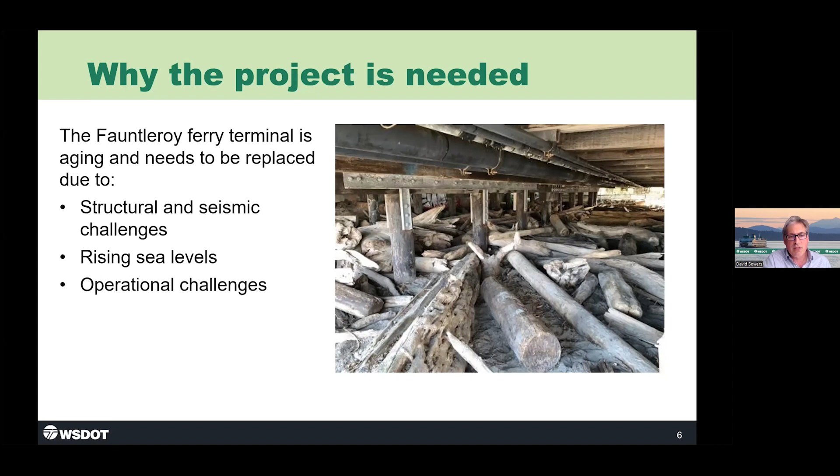So what we're using to start this sort of planning and initial environmental process is a process called the Planning and Environmental Linkages Process, or PEL for short. You'll see that term used throughout this presentation. This early planning phase helps Washington State Ferries identify transportation issues, environmental concerns, community values, and economic goals early in the project planning.

We are currently in the level 3 screening process, where we are considering things like traffic conditions, cost estimating, permitting requirements, and ways to make the terminal work safer and more efficiently for everybody. We are also studying Good to Go, which is a system that we use in the metropolitan area to toll State Route 99, 405, and SR 520, for example.

So during this phase, the project team, using input from the community and our advisory groups that Hadley mentioned earlier, will refine this range of concepts, which we call alternatives. And later in 2024, hopefully by the end of this year, WSF will recommend an alternative that will go into the formal environmental review process, which is called NEPA.

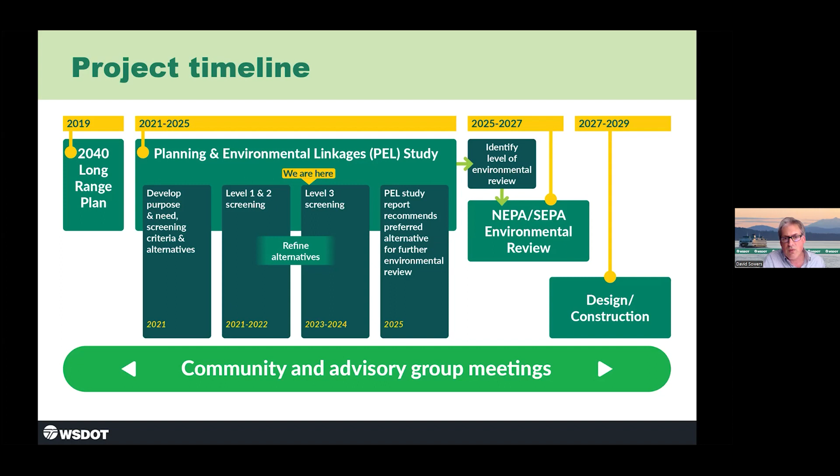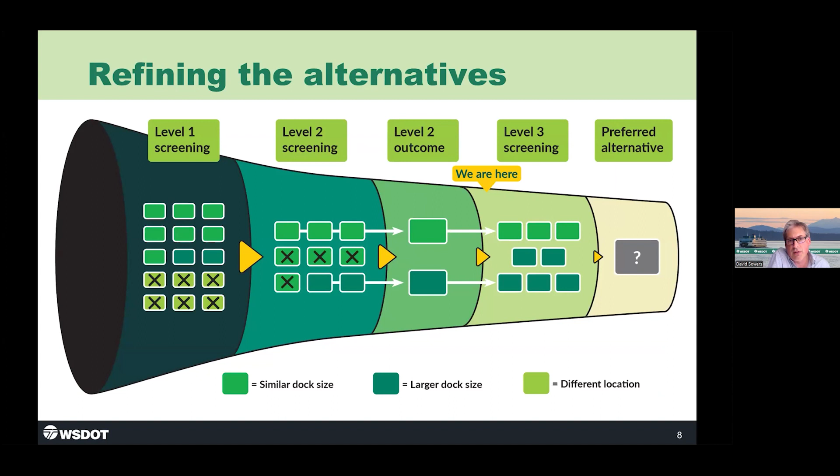All right, so I'd like to share a little bit more about where we are in the process. The graphic summarizes the process that we're using to narrow down the range of alternatives. We've eliminated options outside of the Fauntleroy area when we did our level 1 screening. And at the end of level 2, we decided on 2 main options. Now we are further refining those alternatives before we recommend an alternative that will move forward next year.

I do want to clarify some terminology on a same footprint alternative that was studied during the PEL process. This alternative was a dock that would be exactly the same size as the footprint for the existing terminal. Not to be confused with terminology like same size dock, which represents a dock that has a similar holding capacity as the current dock. This same footprint alternative did not meet several elements of the project's purpose and need.

It did not provide efficient and safe loading and fare processing for pedestrians, vehicles, and bikes. The dock would also be too crowded for crews to effectively sort and stage trucks, ADA folks, and emergency and other priority vehicles. It did not provide operational efficiencies that support reliable service, while again meeting the service levels that we project for this route in the 2040 long-range plan.

And of course, the difficulty we have in sorting traffic, as many of you know, for 2 destinations. This same footprint size also did not improve multimodal connections or enhance customer experience or accommodate ridership growth consistent with the long-range plan. So with that, I'm going to turn it over to Ed Thomas, who's going to walk us through the alternatives a little bit more.

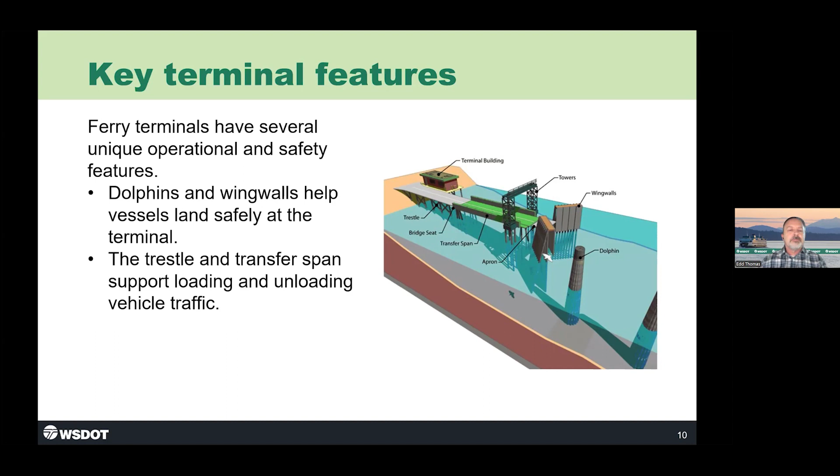Common features of the new terminal. There are several key features consistent across all alternatives: replace the dock at the same location, accommodate 186 vehicles between dock and Fauntleroy Way holding, meet seismic design standards and accommodate rising sea level, space for large trucks to safely navigate, wider lanes and space for people walking, rolling, biking, and driving motorcycles.

More space for operations, a new terminal building, a dedicated drop-off and pickup area for passengers with disabilities, a larger toll plaza with two toll booths, and minimal dock widening near the shoreline. In addition to these features, we are also studying Good to Go, advanced ticketing, and other features like overhead passenger loading, and working with our partners at Seattle Department of Transportation to consider changes to the intersection.

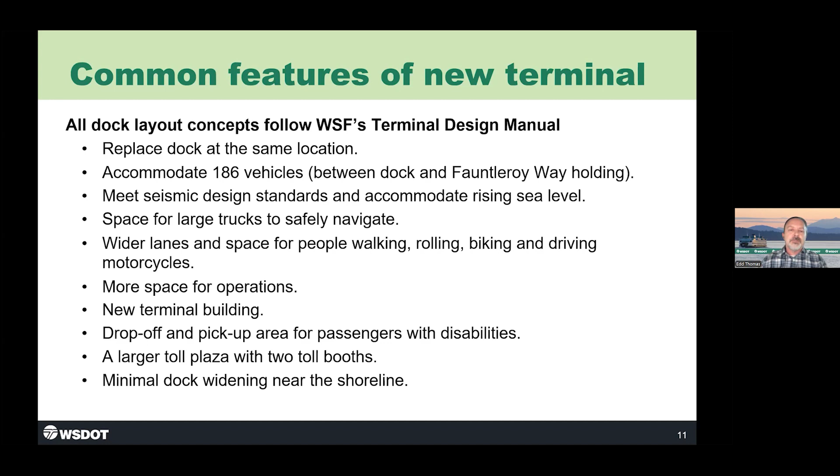This alternative slide shows the collection of all the alternatives. There are slight variations in each alternative, and we're going to run through the slides of these options quickly a couple of times to show the differences. Then I'll talk in more detail about each alternative.

As we go through these, please take note of the shaded blue areas on either side of the dock. This is eelgrass habitat, which Marcia will speak to in greater detail a bit later. We designed the terminal options to avoid impacting this environmentally sensitive area.

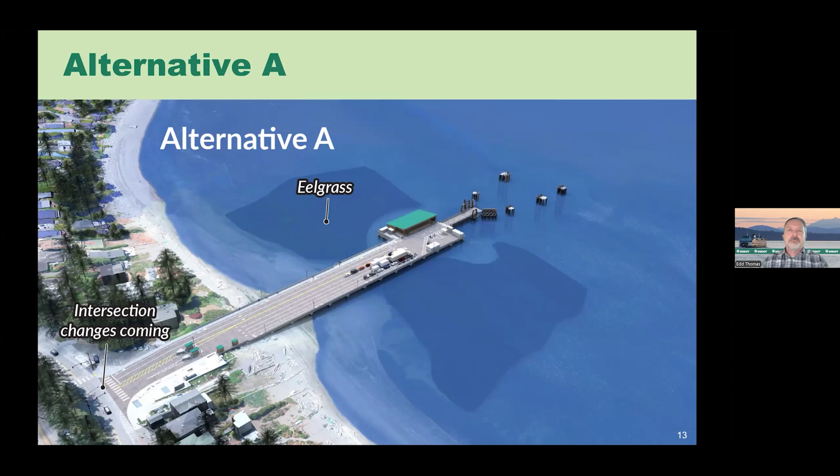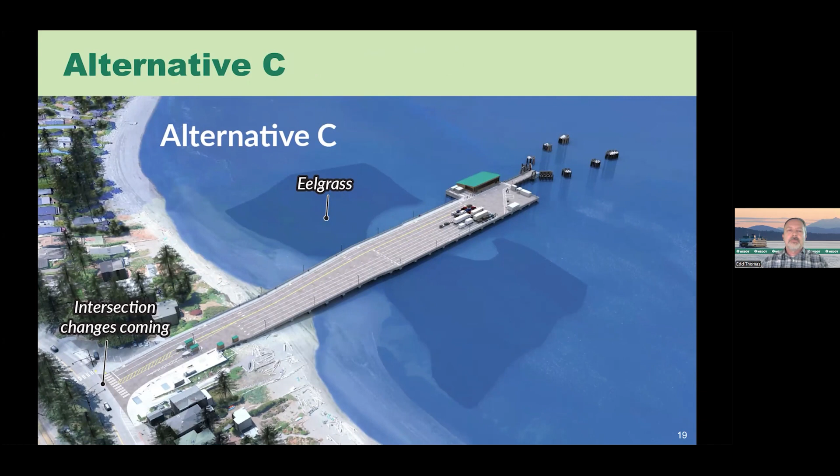Now I'm going to cover each alternative at a high level, but as a reminder, this information is available in detail at our online open house.

Alternative A, the first option, replaces the dock at the same size as the current dock and maintains the existing wing walls and dolphins, the in-water structures that help guide the ferry into place and protect the dock. This concept is slightly wider than the current dock to provide space for a large vehicle to navigate and provide space for pedestrians, cyclists, and vehicles. The dock capacity is 76 vehicles, fewer cars than the current dock. The dock width is 85 feet. The length of the pedestrian walkway is 850 feet, and it has 4 holding lanes.

Alternative A1 is similar to alternative A, but includes new dolphins and new wing walls. This option is slightly longer and holds the same amount of vehicles as the current dock. Dock capacity is 84 vehicles. The dock width is 85 feet. The length of the pedestrian walkway is 905 feet, and it has 4 holding lanes.

Alternatives A2 and A3 are variations of alternative A1 that have the same layout as alternative A1 and include good to go and advanced ticketing as A2, or only advanced ticketing technology as A3.

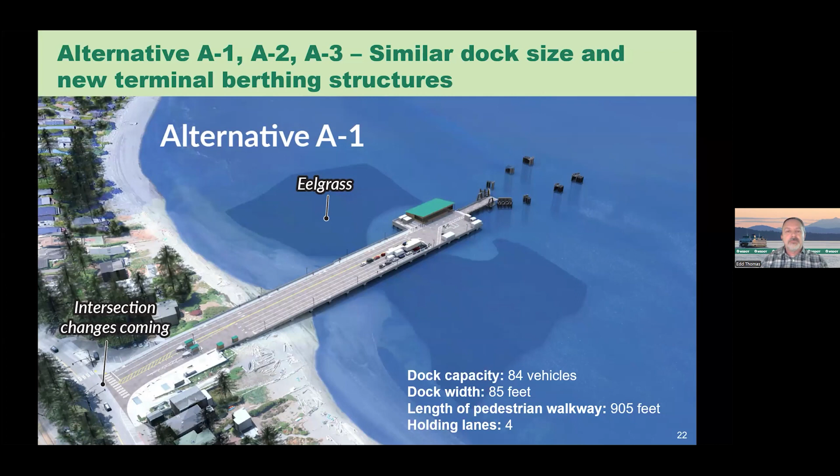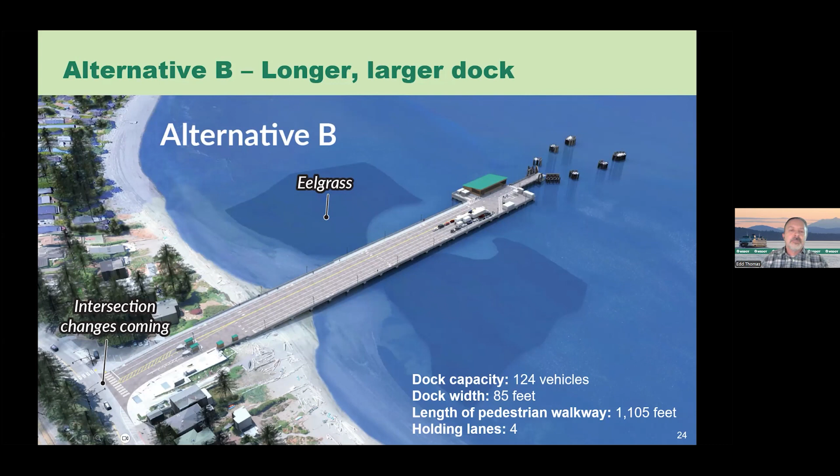Alternative B is similar to alternative A1, but is longer, moving the transfer span, wing walls, and dolphins to deeper water. Moving these elements to deeper water may allow eelgrass and macroalgae to regrow in and around the scour hole. This dock capacity is 124 vehicles, or 1 full Issaquah class ferry. Dock width is 85 feet. The length of the pedestrian walkway is 1,105 feet, and it has 4 holding lanes.

The next alternative, alternative B1, is the same length as alternative B and includes 1 extra holding lane on the north over deeper water to minimize impacts to Cove Park and environmentally sensitive areas closer to shore. The dock capacity is 155 vehicles. The dock width is 94 feet.

The length of the pedestrian walkway is 1,105 feet, and it has 5 holding lanes. Alternative B2 is similar in length to alternative B1 and adds 2 shorter holding lanes to the south, further out over the water. This tapered dock design is narrower near the shoreline. This dock capacity is 155 vehicles. The dock width is 76.5 feet near shore and 103 feet over deeper water. The length of the pedestrian walkway is 1,105 feet, and it has 4 full-length holding lanes and 2 half lanes.

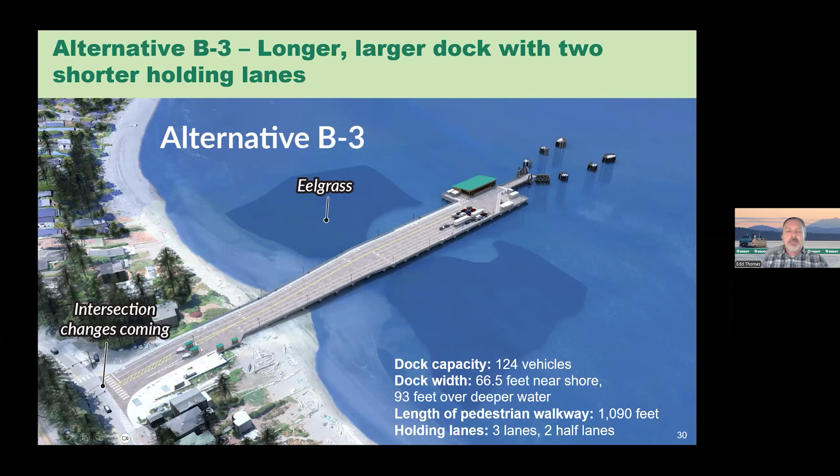Alternative B3 is the same configuration as alternative B2, is slightly shorter than alternative B2, and includes 1 less holding lane. The rest of the design features are the same as alternative B2. This dock capacity is 124 vehicles. The dock width is 66.5 feet near shore and 93 feet over deeper water. The length of the pedestrian walkway is 1,090 feet. It has 3 full-length holding lanes and 2 half lanes.

The last alternative, alternative C, is the same configuration as alternative B2 and adds a full-length holding lane on the north side of the dock. This dock option can hold 186 vehicles, removing the queue on Fauntleroy Way Southwest on most typical days. The dock width is 85.5 feet near shore, 112 feet wide over deeper water. The length of the pedestrian walkway is 1,105 feet. It has 5 full-length holding lanes and 2 half lanes.

And now I'd like to hand it over to Charlie.

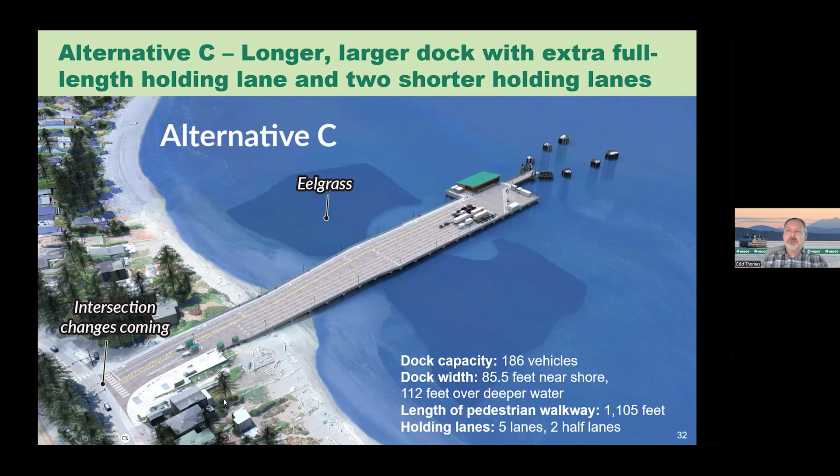We have developed design renderings to help you better visualize the differences between each one. But please keep in mind that these show conceptual finishes based on the Washington State Ferry's new Mukilteo terminal. The intent is to show the dock footprint and general layout of each alternative. We will seek community input on the look and feel of the terminal a little later in the design process.

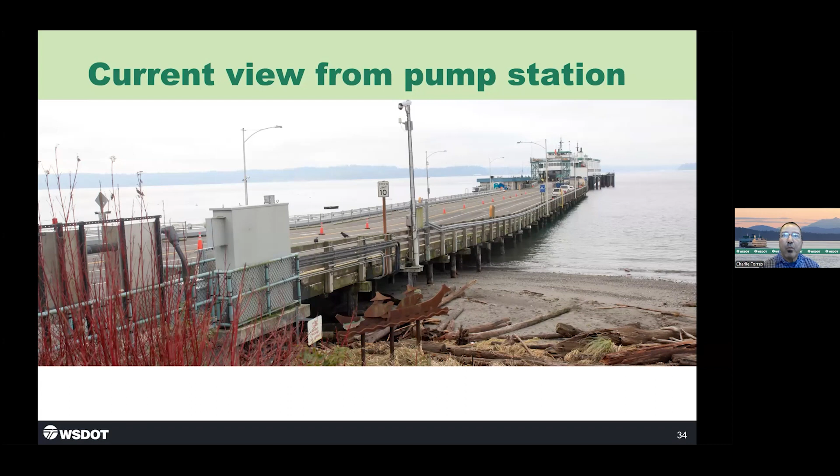The first image of the current dock is taken from the King County Pump Station. These renderings help show what each dock option looks like near Cove Park. This is a current view from Cove Park, and these next few slides show how each alternative looks from the beach.

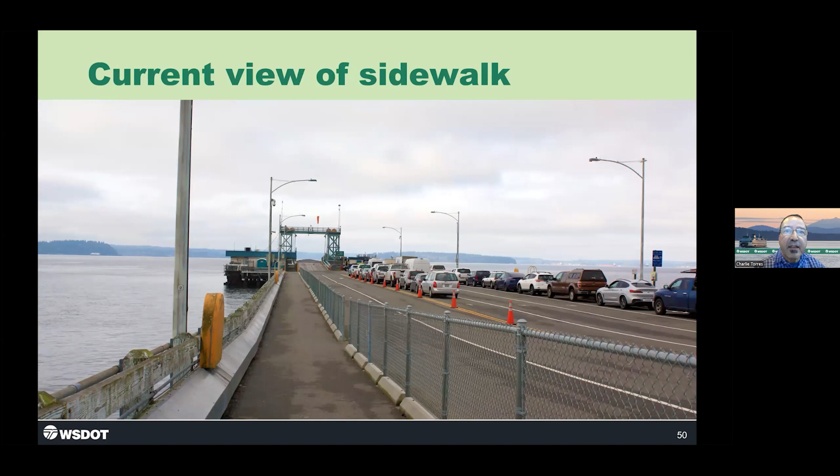Okay, the next view shows the existing walking path and what the pedestrian pathway and dedicated bicycle lane look like. The walkway is 7 feet wide, the same as the current dock.

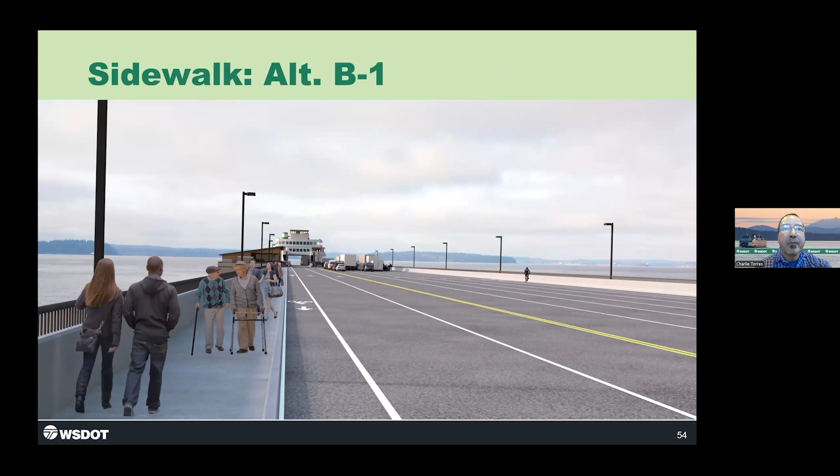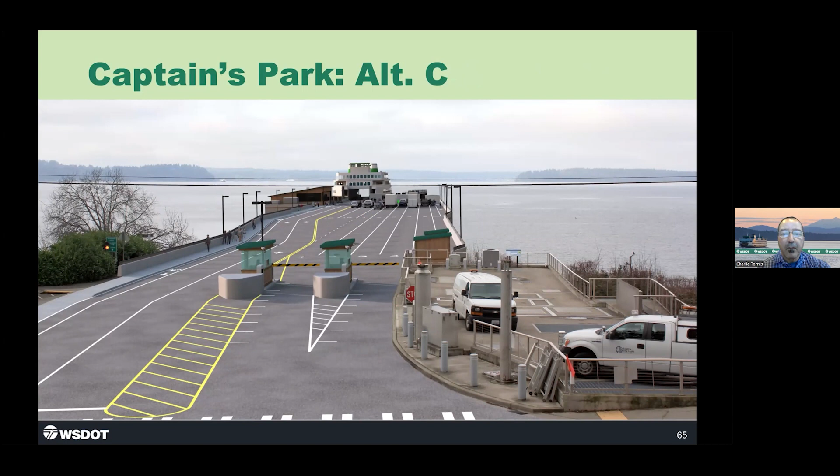To address one of the key needs for this project, improving terminal efficiency and faster ferry loading and unloading, Washington State Ferries will improve the intersection of Fauntleroy Way Southwest and the terminal at Barton Street Southwest. Washington State Ferries is working closely with agency partners, specifically Seattle Department of Transportation and King County Metro, to plan an improved intersection configuration that includes a traffic signal.

These improvements are needed for any alternative selected and will be needed during construction of the new terminal. Washington State Ferries will begin intersection improvements ahead of the larger terminal replacement project. We will share more information as plans progress.

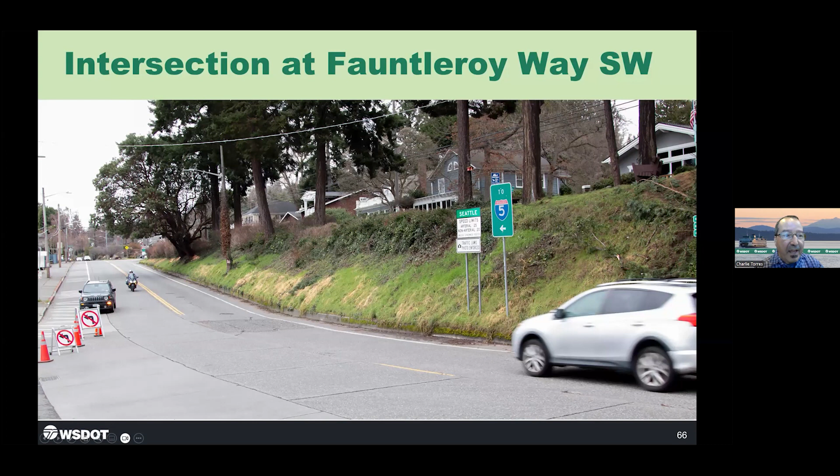And now I'm going to hand it over to my colleague, Marsha Tolon, to talk to you about permitting and environmental issues. Okay, thank you, Charlie. I'm Marsha Tolon with the Washington State Ferries, the permitting and environmental lead.

The image now shows key environmental features and resources near the terminal that we've considered as we develop the alternatives and will consider when we screen the alternatives. There are some key environmental features or elements that I'd like to point out.

First, there's the intertidal and nearshore habitats near the dock that provide valuable habitat for salmon and other marine life. There are eelgrass beds north and south of the trestle, and a high concentration of kelp to the west of the ferry slip. There's no eelgrass or macroalgae in the area around the end of the dock, where propeller wash from vessels creates a scour hole.

There's Fauntleroy Creek, which flows under Fauntleroy Way Southwest and then under the dock and into Puget Sound. Fauntleroy Creek provides spawning habitat for coho salmon and for coastal cutthroat trout.

The dock is supported by 430 creosote treated timber piles. With this project, the dock also includes more than 1,000 tons of toxic creosote treated timber, a known water pollutant. The density of the piles also influences the flow of Puget Sound tidal waters and Fauntleroy Creek near the trestle.

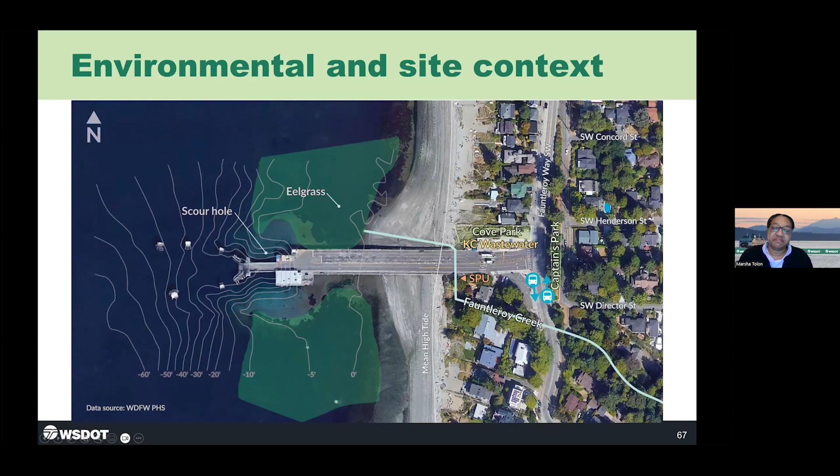As we move closer to recommending an alternative to take into the environmental review process, we first take it through level 3 screening. That process is similar to what we did for level 2 screening. We developed these criteria based on our purpose and need statement, which was extensively reviewed by our advisory groups, and that review was in partnership with our advisory groups.

We refined the screening criteria we used in level 1 and 2 to develop our level 3 screening criteria. The screening process is much more detailed for level 3 and uses more specific metrics. The list includes the general categories we used for level 3 screening. To view the full list of screening criteria, please visit our online open house.

The screening criteria categories include meeting requirements for structural reliability, accommodating projected sea level rise, which is resilience, and improving operational efficiency, which is to minimize dwell time, process vehicles more efficiently, and maintain on-time performance.

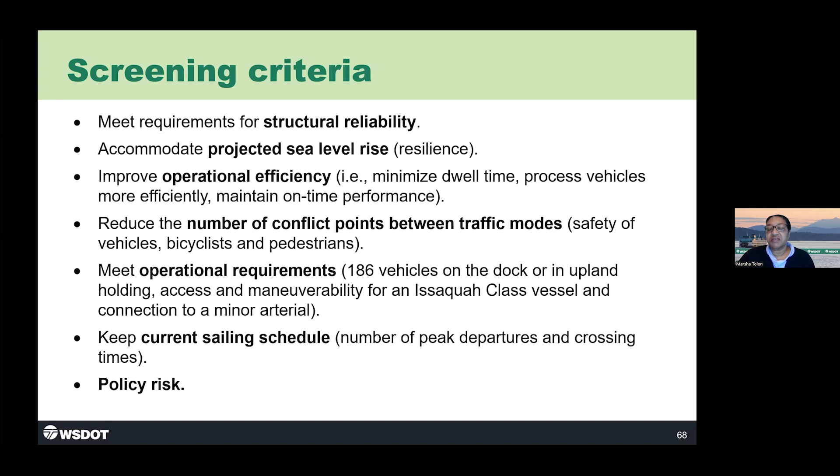The next is keep current sailing schedule, which is the number of peak departures and crossing times, and then policy risk. The next is to enhance multimodal connections, that is to connect to transit or allow for growth in walk-ons, people biking, and for van pools.

The next is avoiding changes to parks and recreational areas. Under the National Environmental Policy Act, this is known as Section 4F and 6F. Under the state laws, it's a matter of projects funded by the Recreation and Conservation Office.

The next is to avoid requiring changes to traffic circulation on local streets in the ferry terminal area. And then project costs, which is for design, planning, for right-of-way, for risk and construction. And then alignment with the project's current schedule.

The next is project feasibility, which is an amount of additional right-of-way needed beyond the existing terminal footprint, for an expanded footprint, for utilities or construction. And then finally, permitting and coordination. This is the level of coordination with external partners, permitting complexity, and tribal coordination.